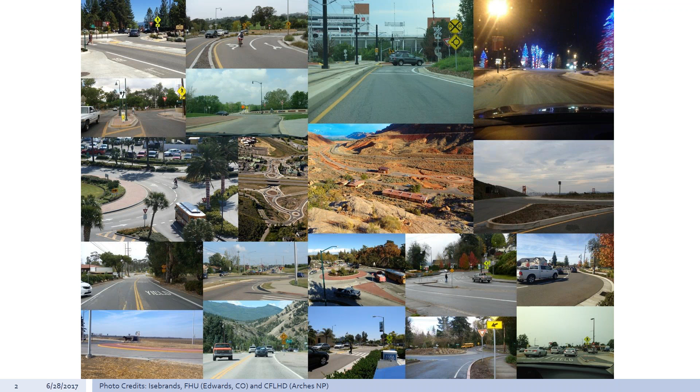If you go there, there's actually a link to the Lucas County website that talks about their existing and proposed roundabouts up there in that area. If you look at the Ohio DOT roundabout website, you'll see some fact sheets and some information on some of the roundabout projects that are being pursued as DOT projects.

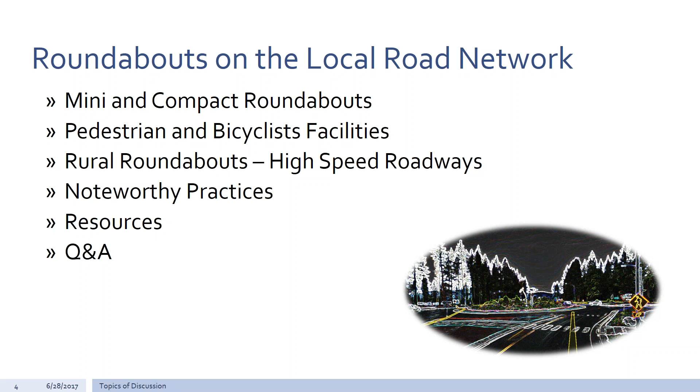And then, of course, resources. We're always digging for good resources and new resources, so hopefully there's something on that list that is new and informative to you all. And then last but not least, an opportunity for us to have some back and forth and some Q&A on roundabouts.

So first off, the mini and compact roundabouts. I'll start with mini roundabouts. We probably have well over 24 mini roundabouts in the United States, and I'll get a little bit more into the details of what actually defines a mini roundabout in a moment. But we do have mini roundabouts in rural as well as urban and suburban areas. Typically, the posted speed in advance of these is less than 35 miles per hour, and the truck volumes tend to be fairly low at these locations. In terms of traffic volumes, typically they are less than 15,000 AADT.

So let's look at some examples. On the right side of your screen, you'll see a schematic. It comes out of NCHRP 672, which is the Roundabout Informational Guide, just reminding everyone that a mini roundabout is different than a neighborhood traffic calming circle. A mini roundabout has a fully mountable center island. Typically, it will have a striped or a mountable splitter island in advance, and the intent of the mini roundabout is to construct it within the existing right-of-way and the existing curb lines if at all possible. So you're minimizing the impact that you have in the area.

The size range is typically between 45 and 90 feet in diameter. I would say most of the most recent mini roundabouts have been closer to the 75 and 90 foot range in terms of that ICD. And just a reminder, when we're talking about the diameter, I'm talking about from outside here to outside here in terms of that distance.

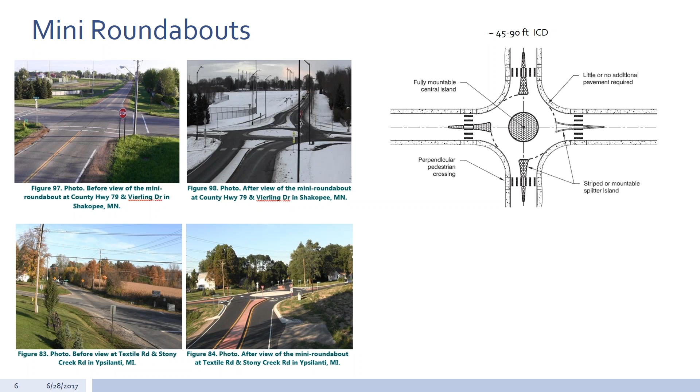You get that peaking neighborhood traffic, the peaking school traffic that we're all familiar with, in terms of sometimes that 5-minute peak at a 4-way stop can really cause a lot of problems for us. So again, we're talking about fairly low volumes, but those peak periods can really put a damper on someone's drive to school in the morning.

So we're seeing more and more agencies, even state DOTs. The mini roundabouts typically were on the local road network, and now we see several DOTs that are jumping into the mini roundabout venue, if I can call it that, looking at how it might solve capacity issues primarily at 4-way stop locations. So again, every day I hear about a new mini roundabout that someone is proposing or looking at across the country.

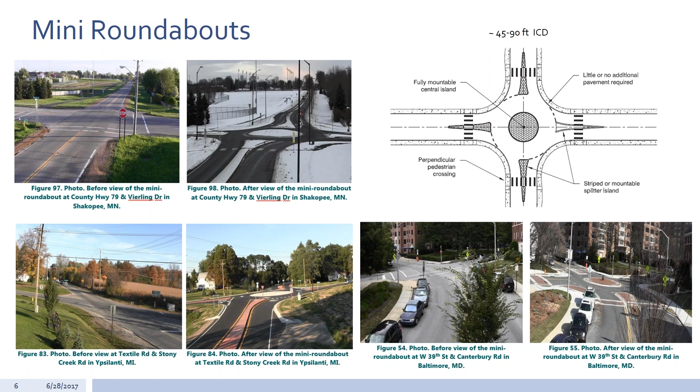Moving forward to talk a little bit about compact, and then we can come back and chat about mini roundabouts again in terms of questions that you might have. Compact roundabouts tend to be between 90 feet and 120 feet in diameter. In the original Federal Highways roundabout guide that was published in 2000, there was an urban compact category for roundabouts. And that was dropped with NCHRP 672, the 2nd edition of the roundabout guide.

And I really think it's important that we remember we can have a roundabout in that 90 to 120 foot range that can still accommodate buses, fire trucks, as well as semi vehicles. We just have to know that the speeds are definitely going to be a lot slower, but it does allow us a lot of flexibility.

The image you're looking at there is actually Kings Beach, California, on the north side of Lake Tahoe. There are 2 small roundabouts on that corridor. It happens to be a state highway; however, the project was driven by Placer County. It was really driven by the locals in terms of getting people out of their cars and being a part of that community, using the beach that's there, as well as slowing traffic down.

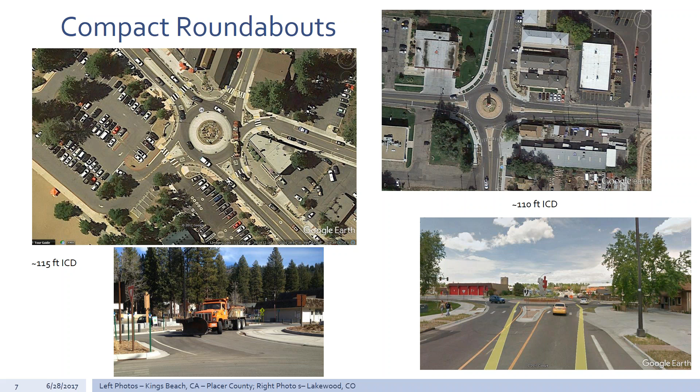So I'm going to pause here, and I'm going to check the chat pod for some questions. And then hopefully, if I can get it to work, I'm going to try to show you all a video of a before and after of a mini roundabout in Lake Stevens, Washington. Okay, so Michael Dolek is saying that he's currently building a single lane, 3-leg roundabout, 90% complete.

Okay, good. Yeah, and so if folks that are on the webinar have roundabouts that you want people to know about, please go ahead and post those in the chat pod. And I do have some time to talk about that a little bit. So I'm going to make an attempt here to bring up a video. If it doesn't work, we'll just keep on moving. But I'm going to do my best to bring up a before and after video of a mini roundabout in Lake Stevens. And Victoria, I'm going to ask you if you can see a video running of a 3-way intersection.

Yep, it's going. Okay, so this is just a look, it's always a little gloomy there in the Pacific Northwest, of the 3-way stop. You can see it's adjacent to an arterial there, but a lot of queuing was occurring. There's a lot of shopping off to the left of this photo. You can see the pedestrians walking. So again, this was where Lake Stevens, Washington was really looking for a solution to a capacity issue that they were having at this particular location. A lot of delays. You can see the queue is building there, both on the left side of the screen as well as the top side of the screen coming into the intersection.

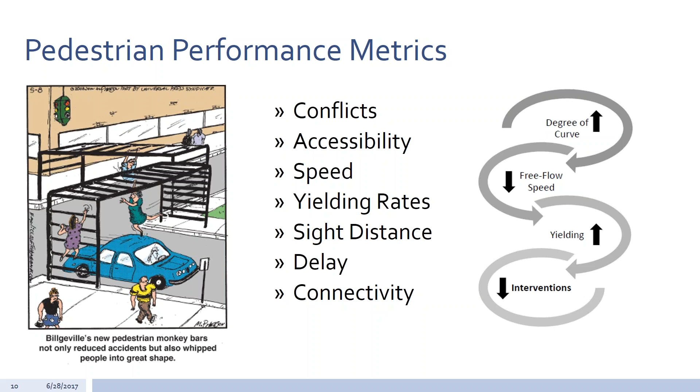And then published in January of 2017 was actually an update or a continuation of that NCHRP 674, published as NCHRP 834, which really is a guidebook. So it's a guidebook to help us as practitioners make sure that we are making every consideration possible related to a safe and accessible pedestrian crossing at our roundabouts. And in this case, it also applies to channelized turn lanes.

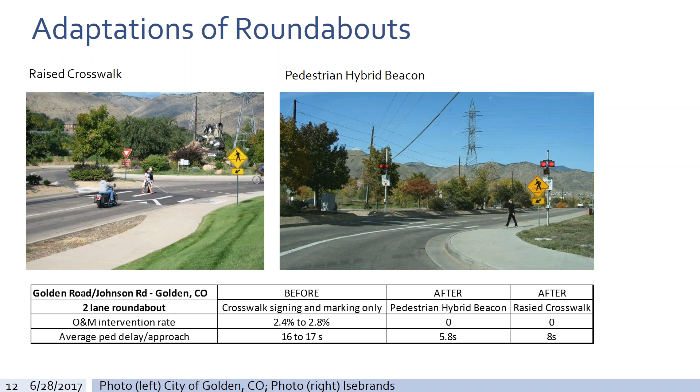And of course, the pedestrian hybrid beacon does have the red signal, so that is indicating to us that we are actually stopping. You can see right below the average ped delay per approach. It was a little bit more with the raised crosswalk versus the pedestrian hybrid beacon. However, again, that intervention rate was 0 in those studies. So really important information as we consider multi-lane roundabouts in the future and making sure that we have an accessible design for all of our users across the country.

I'm going to shift gears now to bicycles in terms of taking the lane. One of the things that is very, very important, whether you have a shared lane in advance of a roundabout, an actual bike lane that's marked, or a shoulder, no matter how the bicyclist is approaching the roundabout, it's really important that we communicate what we want that bicyclist to do. Now, an advanced bicyclist or a road bicyclist or a confident bicyclist may take the lane all the way through the roundabout, and that's totally acceptable. We also have the option to use a bike lane.

As it relates to safety, I don't know if you all are aware of the statistics that we have, or, to the best of our ability, what we know related to ped and bike safety at roundabouts.

To our knowledge, to Federal Highway's knowledge, we do not have a pedestrian fatality at a modern roundabout. And again, we're talking about probably 4,500 roundabouts in the U.S. to date that we can count for modern roundabouts. There has been one bicyclist fatality. It did occur about a couple of years ago.

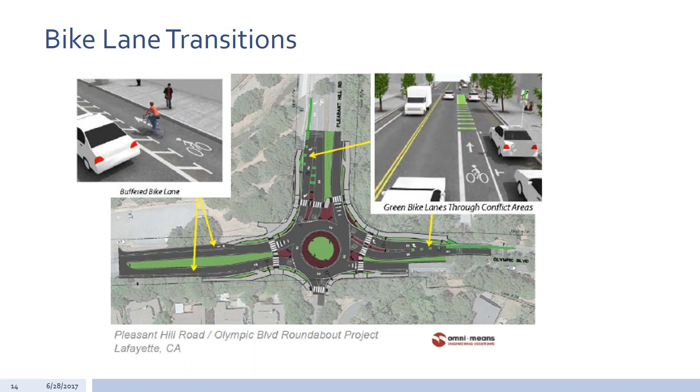So I just provided this example as food for thought in terms of this is really an emerging practice as we transition from bike lanes, shoulders, shared lanes into not only intersections in general, but in this case, of course, roundabouts. So I've got a couple of videos that I'm going to share, and then we can open it up for questions in the chat pod as well.

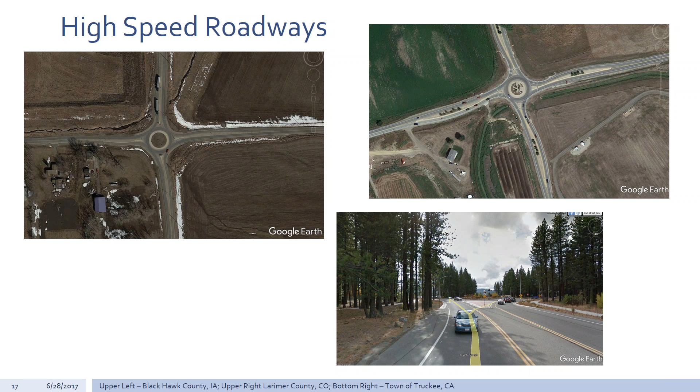So I'm going to bring up more video here, and then I'll go to the chat pod. Okay,

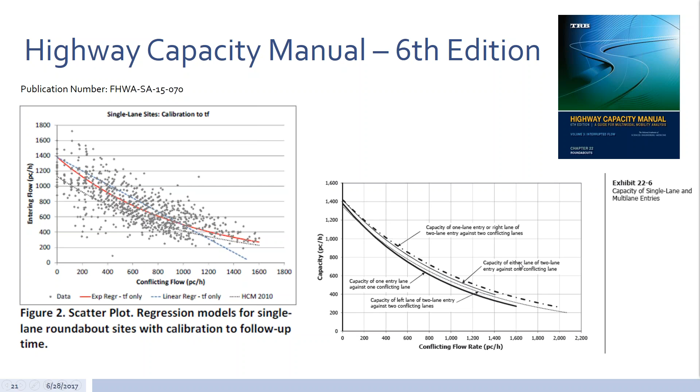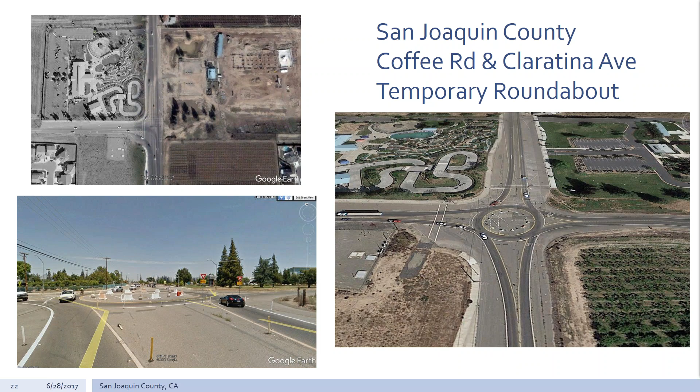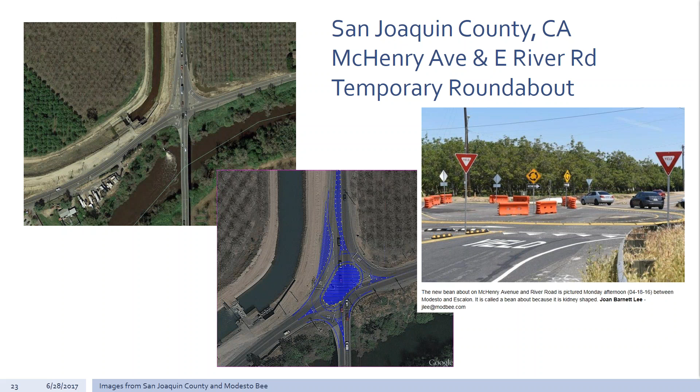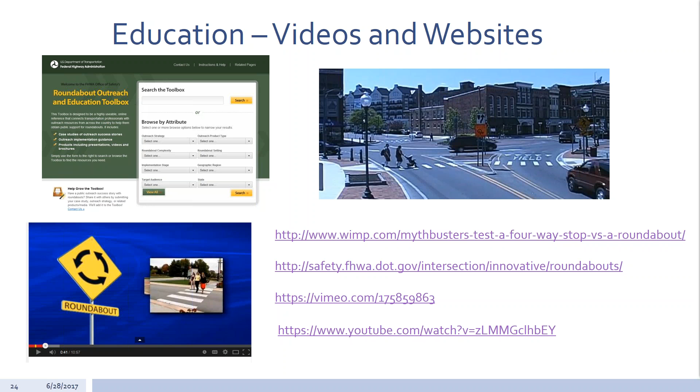Another look here: Mythbusters, if you can still find it, has a comparison of an all-way stop versus a traffic signal versus law enforcement moving people through the intersection. In fact, the roundabout did win from the Mythbusters perspective. The City of Dublin has a really neat video, Drive Like a Dubliner, with several young kids, I'm going to guess from 5 to 8 years old, that talk about how to drive a roundabout. It's very interesting. I think this was in response in particular to State Route 161 and Riverside Drive. Take a look at that if you haven't seen it.

Utilize law enforcement to help be your spokesperson, as well as your local newspaper. Have them help you tell the story that you want to tell about roundabouts or about a project, the reason for the project and how perhaps the roundabout is solving the issues you were trying to solve or enhancing the community in one way or another. And be honest if there are trade-offs too. That's an important piece. Be very transparent about the entire process.

I've got here visualization. Visualization speaks a lot. It speaks to the community. It speaks to business owners. I actually have a visualization from this project. It's not the same exact one, but here's just a look. They used this in the public meeting. So what's the roundabout going to look like? They have a retaining wall. You can see the river. You can see the bridge. It really makes it more real for folks that are having a hard time figuring out how this roundabout fits into their community and into this particular project.

This happened to be a project on U.S. Forest Service property. It also intersected a state highway, but it's an area where the environment is protected pretty heavily. So it was really important that the roundabout fit into the context of this community in this region.

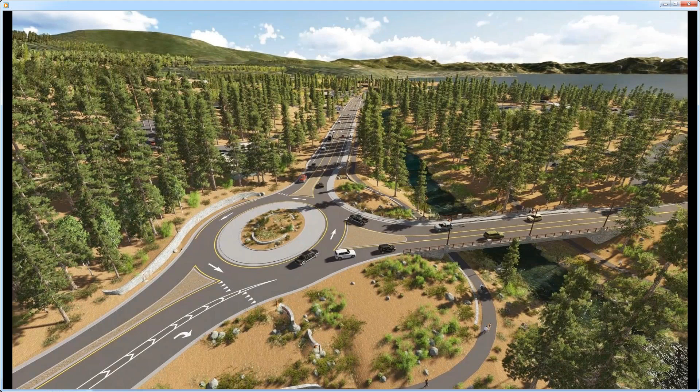Okay, I'm going to go to the chat pod and then we're almost done. I'm going to start at the bottom here. Does FHWA have any publications or documentation on turbo roundabouts? Okay, not yet. So that's something that I am working on in terms of turbo roundabouts.

There are 2 state DOTs that are actively pursuing turbo roundabouts right now that I am aware of. Actually just had a meeting yesterday with one of those DOTs, and we are working with our international partners as well as working together to identify some of the things that we think are important as we look at turbo roundabouts in the United States.

And so, to be forthcoming, that is actually something that I'm hoping to be working on in the coming year in terms of getting some guidance. And from that perspective, it's really going to be using our international friends, as we did 20 years ago when we did our original guide, to help us be in a place where we can intelligently talk about turbo roundabouts.

So good question, timely question. And Brandon, if you want to reach out to me, I can give you a status update on the other folks that are working on that. All right, so I'm just going to roll right into resources. This will go pretty quickly here.

So if you weren't able to make it, and I know there were several people from Ohio that made it up to the TRB International Roundabout Conference in Green Bay in May, most of the presentations are online already. So teachamerica.com has always worked with TRB to record the sessions, so you can hear the speakers talk, you can watch the slides, but they actually have most of the information all the way back to the 2005 conference. I think not all the posters are up from 2017, but a great resource.

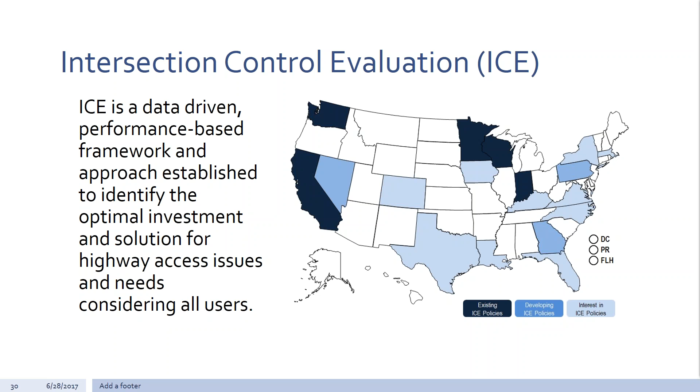Okay. So this is something, again, as you work with your partners in the states, this has been a state DOT-driven process. However, we've heard from a lot of local agencies that have benefited from this process and are using it themselves to help make the best investment decisions, as well as communicate to the public why one alternative maybe is best versus another. And here's that list of the publications and research, some of them dating back a little bit. Life cycle cost analysis of intersections.

There's actually a spreadsheet tool that goes along with that tool, like I talked about with the performance metrics. Roundabouts on corridors. There's the synthesis of roundabout practices that basically did a survey of all the state DOTs. I mentioned NCHRP 834, which was that accessibility of multi-lane roundabouts and channelized turn lanes.

There is an ongoing study to update basically the safety performance functions and crash modification factors for roundabouts. That's NCHRP 17-70. That's ongoing. I'm hoping that that's maybe done, or published I should say, by the end of this year, beginning of next year. And that would be information that would be updating, again, the safety performance functions and the crash modification factors that you would see in the Highway Safety Manual as they pertain to roundabouts.

Mini roundabout safety and operational study, that is near completion and publication. It's actually just under review right now, where it's basically a study that looked at the before and after operations and safety of converting intersections, typically from two-way stop control and all-way stop to roundabouts.

And then last but not least, I'm excited to let you know that NCHRP has approved the project to move forward with a third edition of the Roundabout Guide. So this would be taking all of this research that I just talked about and getting it into that one document again, which would be the third edition of the Roundabout Guide. So it will basically replace NCHRP 672.